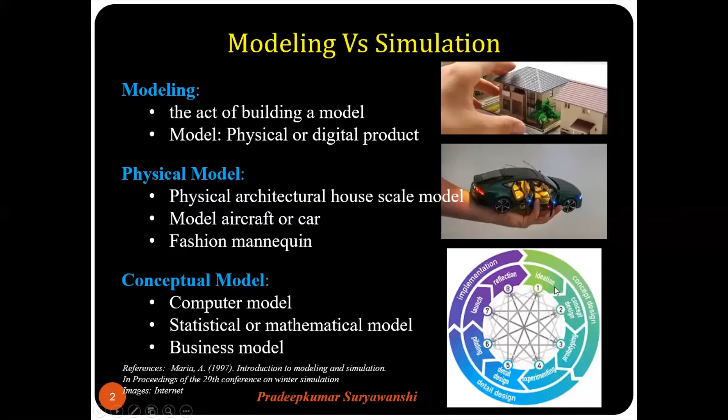Now coming to simulation, simulation is the process of using a model to study the behavior and performance of an actual or theoretical system. The purpose of simulation is to study the characteristics of a real life or fictional system by manipulating various variables. Through simulations, we can evaluate a model for optimum system performance, or we can make predictions about a real system. Simulations are useful to study properties of a model of a real life system, and these real life systems would otherwise be too complex, too large or small, too fast or slow, not accessible, too dangerous, or unacceptable to engage with.

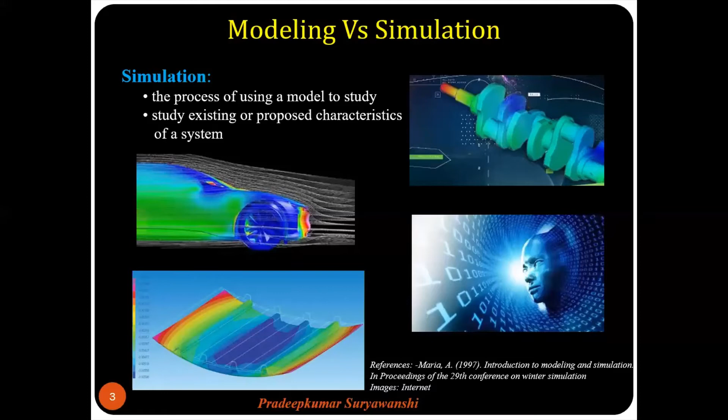So nowadays, there is a hypothesis that the whole human population on the planet Earth is in simulation by some advanced beings in a distant galaxy. And this hypothesis is getting a lot of attention and popularity in the scientific world. Now, that is just a hypothesis. It is not yet proved. But just for fun, you can watch a sci-fi movie. It is a short movie actually with the same name, simulation, and it's fun actually.

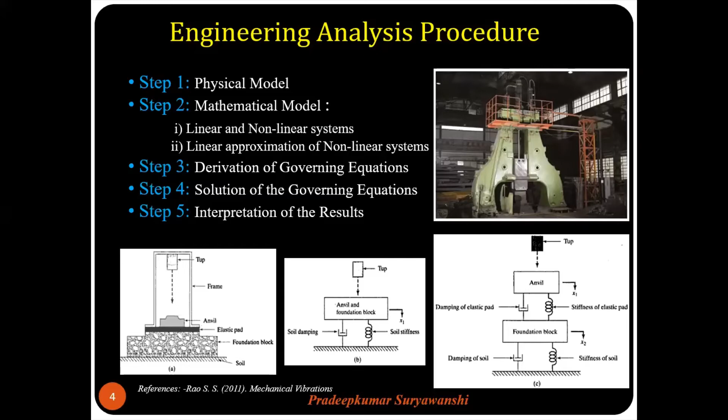Okay, so I'll read the first question. In which sectors do you see applications for the simulation of composites? The clear-cut answer here is the automotive and aerospace sector, which is quite acceptable. And at the distant second place stood commercial vehicle construction, mechanical engineering, medical technology, and rail vehicle construction.

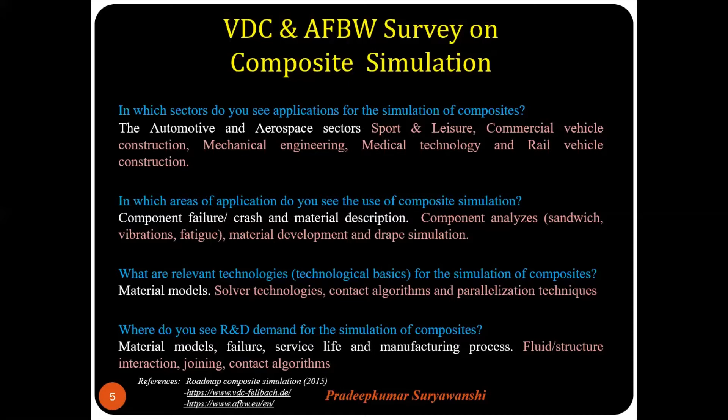This is due to their desirable characteristics such as lightweight, corrosion resistance, high strength, and design flexibility, among many others. However, if you consider biomaterials or so-called biocomposites such as cortical bone, they display mechanical properties that are very different from traditional engineering materials. This is a very important statement: biocomposites are capable of simultaneously optimizing competing properties such as strength and toughness. It's very difficult to find these two contradictory properties in a traditional engineering material.

And even though we have manufactured some good quality composite materials, we have still not been in a position to replicate this particular property of biocomposites. However, with the introduction of micro and nano reinforcements like carbon nanotubes, CNT, or graphene reinforcements, new possibilities of supercomposites have emerged recently. But in order to develop new materials with radically improved properties, the major challenge is to apply biomimetic strategies to synthetic composite materials. This is another very important challenge.

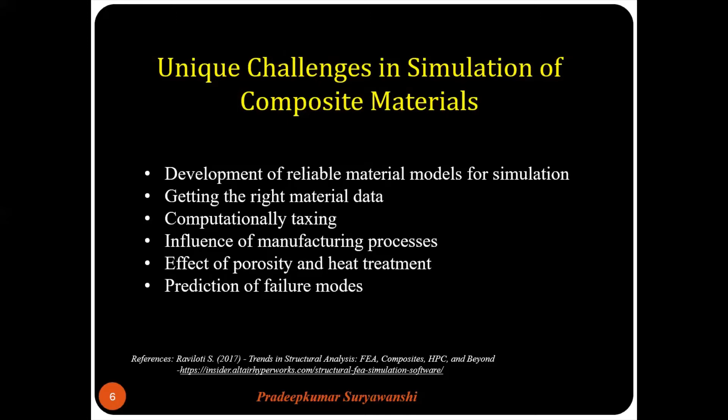Okay, so as a part of my doctoral study, I was trying to zero in on my problem statement, and that time our main focus was how to come up with a material model for simulating deformable objects. Now, if you look at literature, many different models have been presented for this purpose. And typically, the existing models for simulating deformable objects can be classified into three categories: geometry-based models, physically based models, and continuum mechanics-based models.

The geometry-based models are simple geometrical modifications for modeling the deformation behavior of deformable objects, but they are not able to capture realistic physical behavior of the deformable objects. Physically based models describe deformations as physical interaction between simple discrete elements such as nodes or atoms or cells. And the examples are chainmail model, particle systems, mass spring systems, and long element method.

In continuum mechanics based models, the material of an object is considered as a continuum, and constitutive equations are applied over the entire volume. And the examples are smoothed particle hydrodynamics, finite element methods, boundary element method, elasticity theory method, tensor mass method or system, and method of finite spheres. Okay, so along with this, there may be few other simulation models available in the literature.

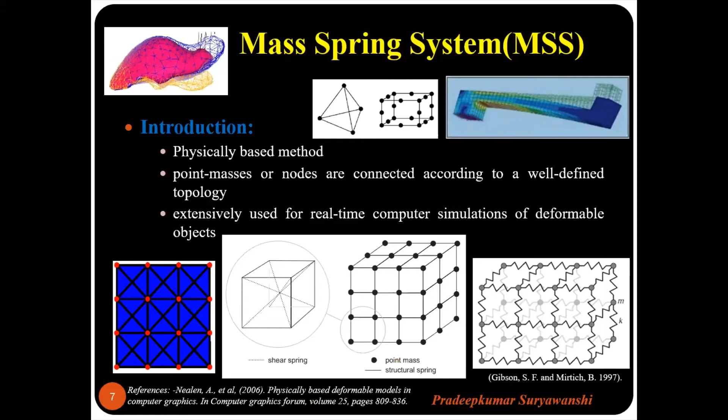Further, it is suited for parallel computation due to local nature of interactions between the nodes. Also, the deformable objects that are very difficult to animate are also successfully animated with the help of MSS models. And finally, very important is MSS models are suitable for damage or rupture simulation with relative ease.

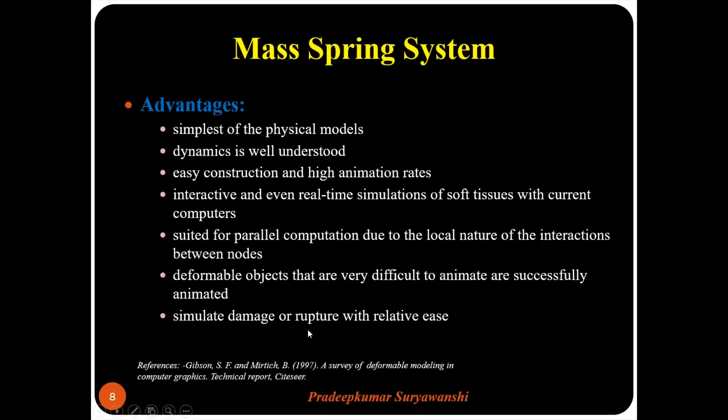Having advantages, it has been applied to various different simulations of deformable objects. Still, it has some open issues. And a very important open issue, according to the literature, is determination of optimal system parameters.

Now, when we concentrate on this determination of optimal system parameters, we come to know through the literature that there are two strategies: a data-driven strategy and an analytical approach to determine optimal system parameters. The data-driven strategy typically focuses on optimization techniques. But before that, what are optimal system parameters?

We are looking at one system. So optimal system parameters are like, what is the spring constant for a given model? What is the nodal mass? Or what should be the mesh topology? Okay. So the data-driven strategy, as I mentioned, is focused on optimization techniques.

And if a change in topology of the mesh is required, the whole procedure for topology identification has to be repeated. And this is not in line with real-time computer simulations. Now, if you look at the analytical approach, there are analytical models which are applicable to specific problems or to a specific choice of system parameters.

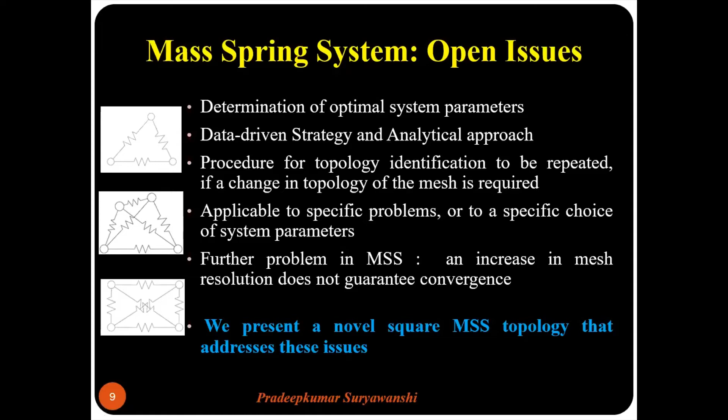The overall arrangement is such that under tensile and compressive loads, the shear spring will undergo negligible deformation, whereas under shear force it will deform considerably. So in all, our proposed model consists of 10 springs, and in order to simulate a generalized material, we looked at orthotropic material, and specifically we concentrated on a special case of orthotropic material called transversely isotropic material.

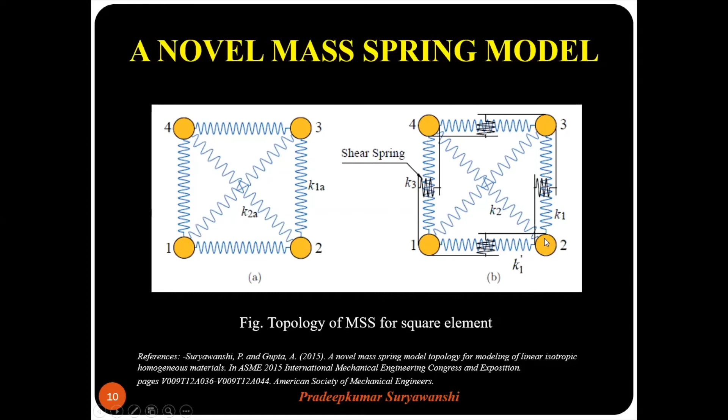For simulating this transversely isotropic material, we considered the stiffness of vertical springs, that is springs between nodes 1 and 4 and 2 and 3, as K1, whereas the stiffness of horizontal springs we consider as K1 prime, and for diagonal springs we considered spring stiffness as K2. So in this slide, I will explain how the deformation of the shear spring happens.

Just give me 1 minute. I'll just drink some water.

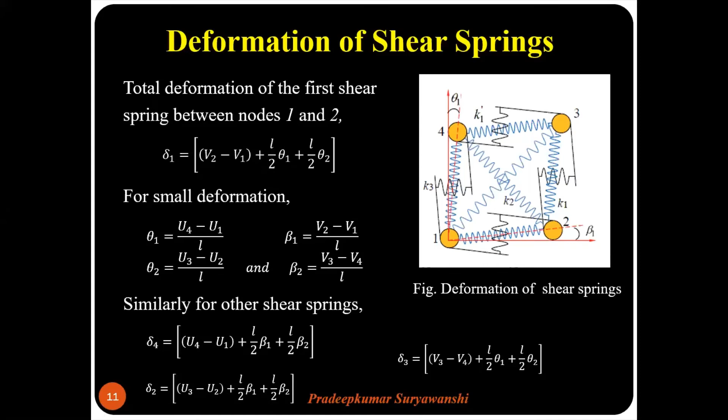So essentially for the basic model we get a K matrix, that is stiffness matrix of size 8 by 8 for this unit cell, and in that same matrix we simply impose the effect of newly introduced shear springs. Now I'll explain in brief our methodology for identification of spring stiffnesses. As I mentioned, the material considered is transversely isotropic material, and we consider an analytical approach for determination of spring stiffnesses.

For this purpose, we consider comparison between a square continuum element and the square unit cell of mass spring model under similar loading and boundary conditions. These are the assumptions. We assume that the bottom left corner of the continuum element and MSS model is constrained, whereas the bottom right corner is on rollers. The material is under plane stress and the system undergoes small deformation. We specifically impose the condition that the continuum and MSS models undergo equal deformation under the applied force.

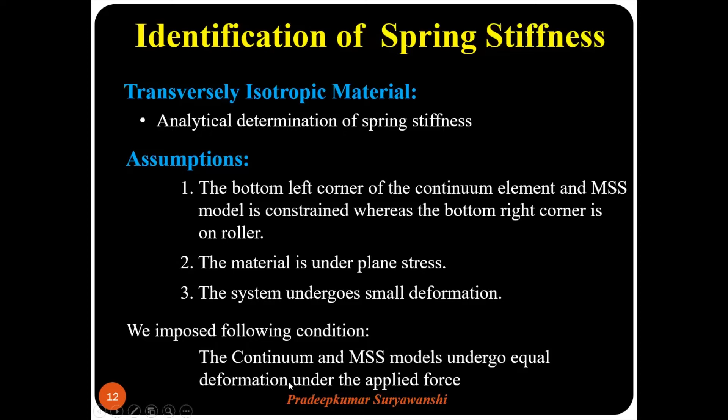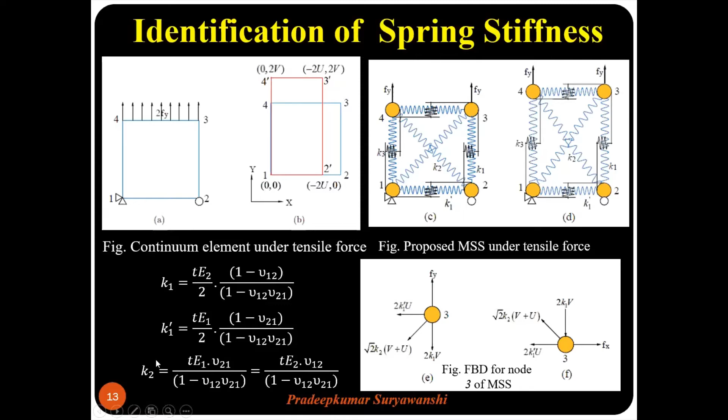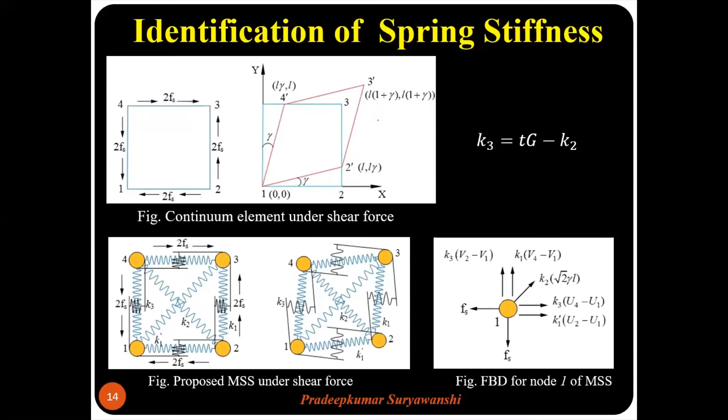Okay, so we are now ready with the various spring stiffnesses for the proposed MSS model, for transversely isotropic material. Once you are ready with the material model, the next step is to verify your model. And how do you verify your model? For that purpose, you need to write some sort of program in the available languages or platforms. We use MATLAB as a platform, and this flow chart shows the overall flow of the solution we are looking at for simulation of different

But here, because our attention is focused on composite materials, I will just present the results related to composite simulations. Now I'll just take you through this flow. Initially, in the code, we specify the material properties, then we give the specimen size, we specify the mesh size, we apply the boundary conditions, and by doing so, we finally calculate spring stiffnesses in the model using the expressions we have derived on the previous slides. And we obtain something called a spring data matrix and also a nodal data matrix.

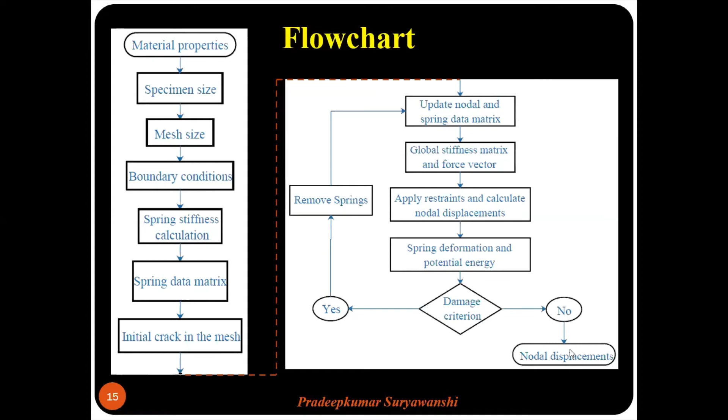Now, for your further understanding, I will just move out of this particular presentation and show my MATLAB desktop. Okay, I hope you are able to see this MATLAB desktop here. Now I'm going to take you.

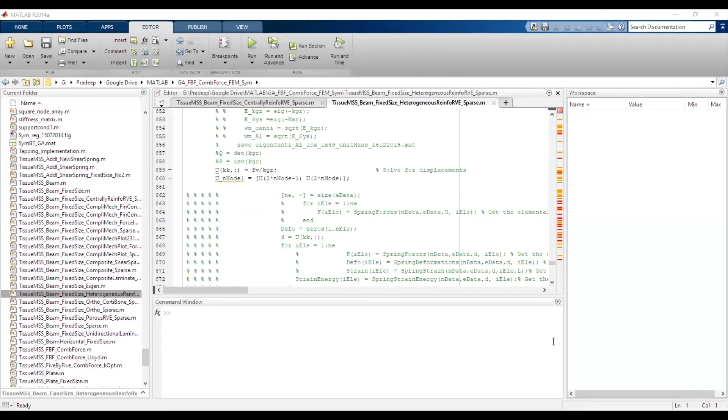Sir, MATLAB desktop is not visible. The PPT is only visible. You minimize that, sir. What should I minimize? You minimize your PPT. Okay. And I need to share this MATLAB desktop, right? No. Just minimize it, it will be visible. Yeah, I did it. So now is it visible? No, it is not visible. Sir, you need to share your MATLAB screen. Okay, so I'll stop share and then reshare it. Stop share and directly share screen. Just click on share screen. Yes, I'm coming to that. I think it should be visible now. Hello? Yes, sir, it is visible. Can you see this change in screen? Yeah, it is visible. Okay, sir.

Okay. Proceed. So I will explain the flow I just explained with the help of the actual code I have written for this purpose. So this is a code for simulation of heterogeneous reinforced composite structure. Basically the basic code is same; we keep on modifying as per the requirements. So here you can see n data. It is defined in this way: x, y, x load, y load, x restraint, and y restraint. That indicates the x coordinate or y coordinate, load in x direction, load in y direction on a given node.

So this n data is nodal data, x restraint and y restraint. Which of these nodes are restrained, or which of these nodes are on roller, we can specify here. If 1 is there, it is restrained, and if 0, the node is free. We have elemental data, that is spring data. There are so many springs in that particular mesh. So E data represents the ith node and jth node, which indicates the spring between the ith node and jth node, and the stiffness of that spring. That is an n cross 3 matrix. Initially, as I mentioned, if you want to introduce some reinforcement or crack, then we specify this particular variable here.

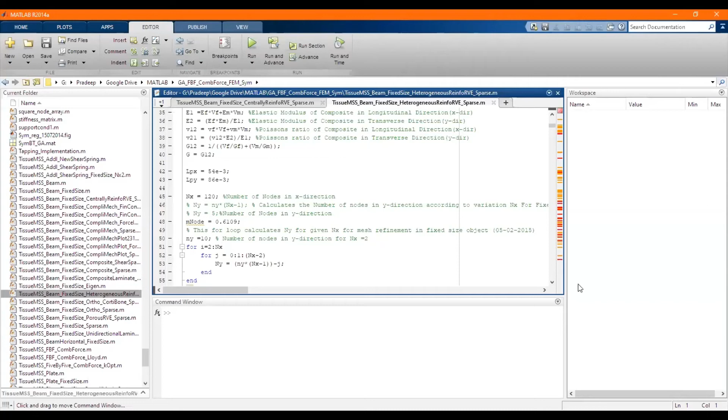Then we define the size of the actual model that is being simulated: 54 millimeter by 86 millimeter. Then we specify the mesh size. For that, I just mention the number of nodes in the x direction, and here it will calculate the number of nodes in the y direction. We also calculate the total number of MSS square elements, that means a square in itself, which comprises of 6 springs. We apply this.

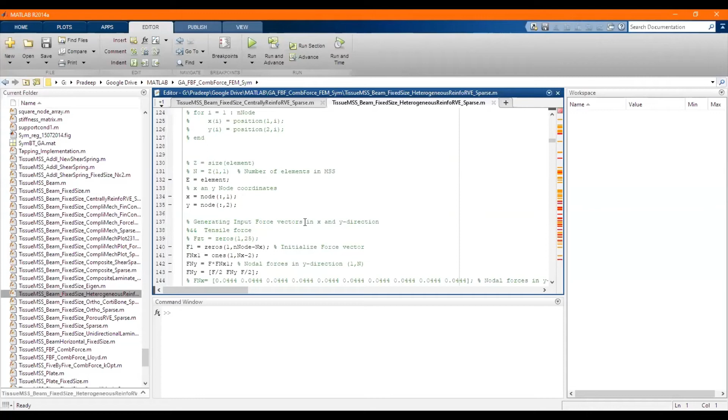Then we calculate the position of each node in that particular mesh, and for that purpose we run this separately written function called mesh region, and it gives me nodal data and elemental data. That is stored in a variable E, and then we generate the input force vectors, because we are applying the input force like tensile load or compressive load or transverse load on the top edge of the beam or plate, if you are assuming the vertical orientation. So here these force vectors are calculated.

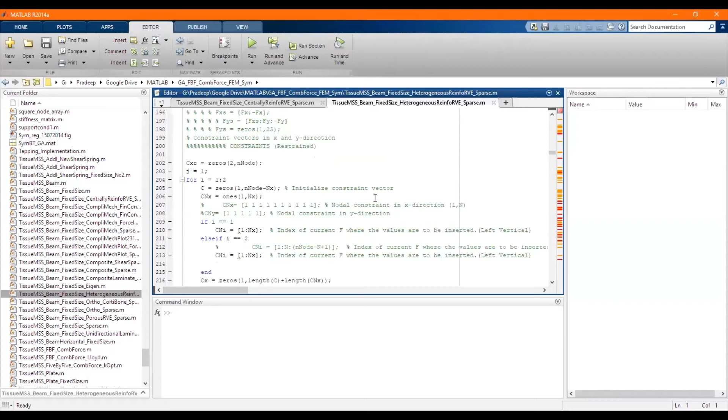The top nodes where the force is applied will have some value, whereas all other nodes will have value 0. So the force vector is created here for different types of loadings: tensile, shear, and compressive. Then we apply constraints or restraints in the mesh. As I mentioned, the left bottom corner is fixed to avoid rotation, and the right bottom corner is on a roller. The specific nodes are given the number 1 if constrained. If constrained in x and y direction, both constraints will be 1 1. If constrained in only one direction, only in that direction we apply 1. Otherwise, it will be 0, indicating the node is free. So I apply constraints here.

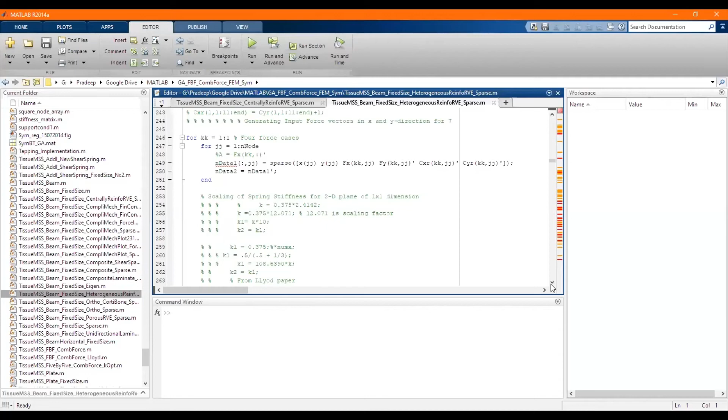We collect force vectors and constraint vectors, and then we come to a loop where we consider the nodal data. Now nodal data is modified with this: the nodes' x coordinates, y coordinates, force vector in x direction, force vector in y direction, constraints in x direction, and constraints in y direction. So this gives me complete nodal data. Once I find the complete nodal data, we make use of these expressions and come up with the elemental data. By elemental data, I mean the springs. There are many springs in the mesh. So what is the stiffness of a given individual spring? How do we assign that? This for loop does that.

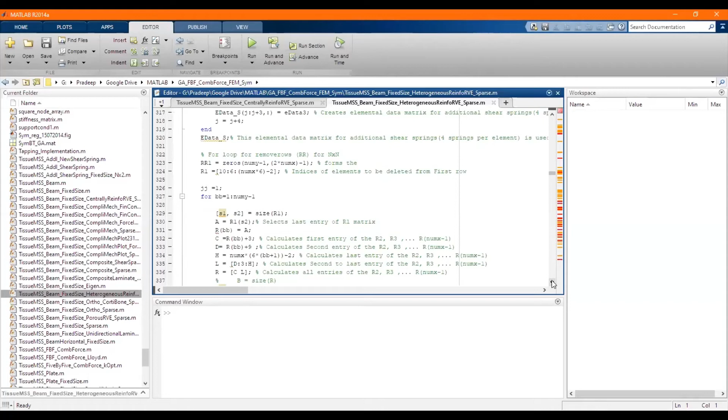Then elements, that is springs, are connected between the nodes, and there are positions where, for example, when 2 unit cells are stacked side by side, there are 2 springs sitting side by side. So we need to add the thicknesses for that and consider a single spring there instead of two springs. That operation is done here. And finally elemental data by removing additional things.

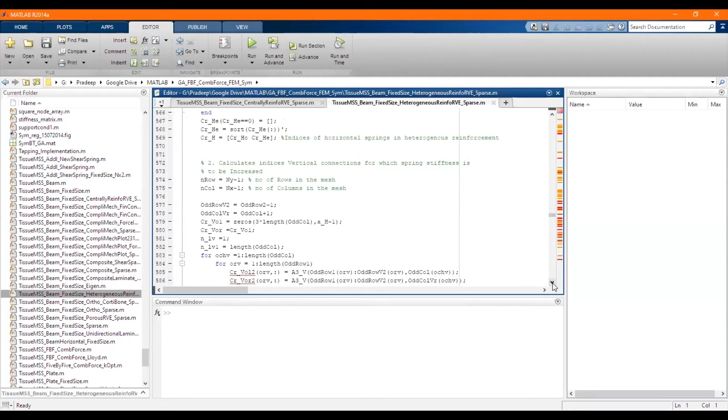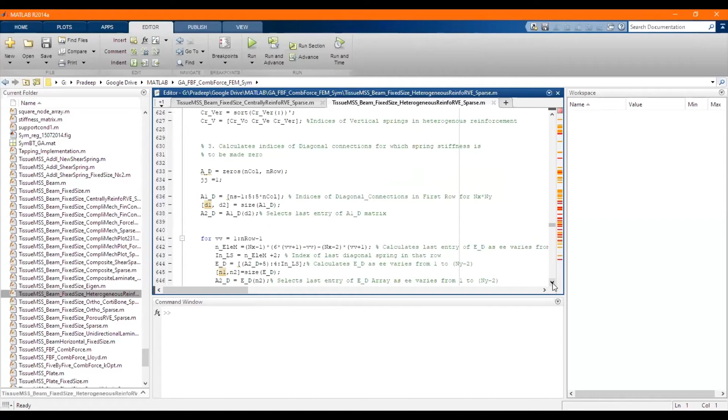Now here we find the indices for horizontal connections for which spring stiffness is to be doubled. Likewise for vertical connections, and for diagonal connections wherever required. Why do we need these indices? We can play with the simulation by changing the stiffnesses of these springs. It can be doubled, reduced to half, changed to 100 times, or removed completely by assigning stiffness as 0. So we find indices of these springs, and we can remove, increase or change the stiffnesses of a desired number of springs in the mesh.

So we are still doing that. Calculate the index of anti-diagonals here; these are required for removing springs. Okay, so still we are into that. Now introduction of central reinforcement in the mesh is completed. So suppose you have a heterogeneous structure or central reinforcement, or if you want to introduce a crack, we require all these indices so we can play with it.

Then we apply the actual force at the top layer, and it will be divided among the top nodes. Here we get the force vectors from the initially calculated force vectors. Further nodal data is updated here according to requirement, and we calculate the KG matrix, that is the global stiffness matrix, by using a function called assemble GSM. That is, we are calling this function. It is another code of so many lines.

Here, K shear is the matrix which is updated in the KG matrix. So this particular matrix will be updated in the KG matrix. So add element MSS underscore K3 new actually adds or updates the global stiffness matrix for our proposed MSS model by adapting the stiffnesses K3 in the global stiffness matrix.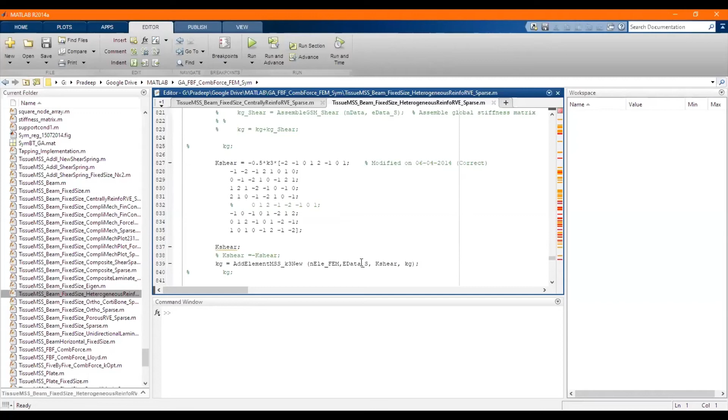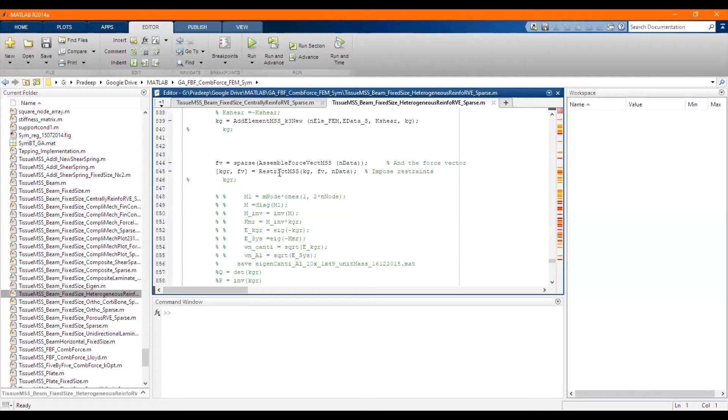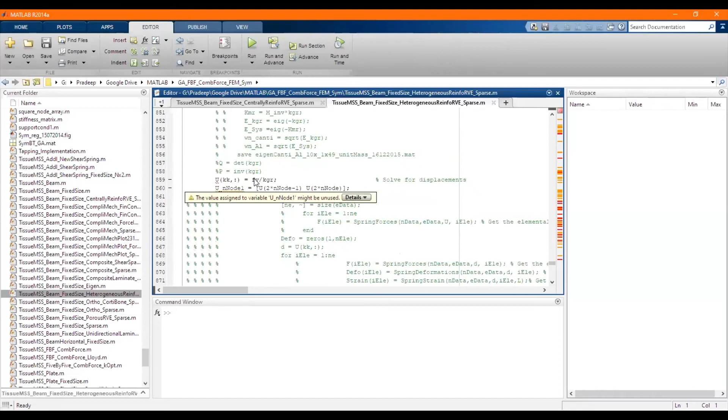Then we apply the force vectors, we apply the restraints, and we come up with the restrained K matrix. And here we solve it for the nodal displacements, that is F upon K. We collect the nodal displacement for all the nodes or a specific node of choice. On the basis of this nodal displacement, we can find out the potential energy or strain energy of the spring elements, or we can find out deformations. And we can use these nodal displacements for post-processing, similar to the FEM model.

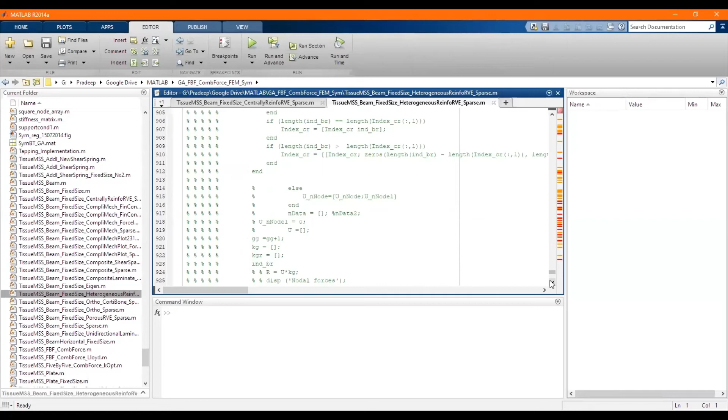Like in FEM, we have some shape functions, and we plot the full field displacement, full field stress, full field strain. All those things can be performed with another code which I have written for the purpose, which I will show just here, stress recovery subplot. I will give the simulation data from the previous code in this code as input, and we will be able to plot full field displacement, full field stress, or full field strain. All these results I will show on my next slide. So I think I will share my PPT again now.

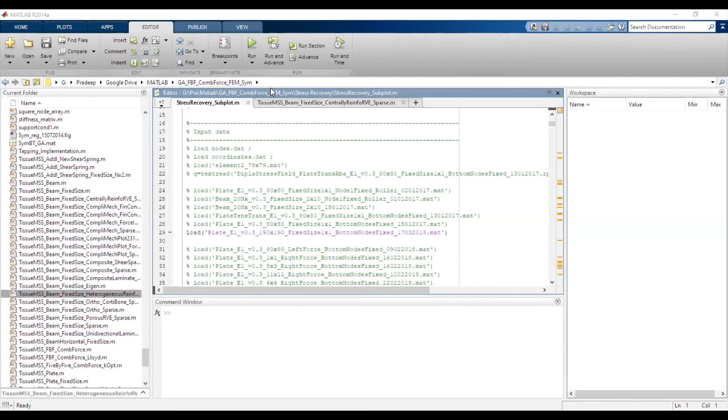Yeah, so is it visible, sir? It's visible, sir. Yeah. So I'll move on to now simulation results. Sir, please make slide show. Yeah. Okay.

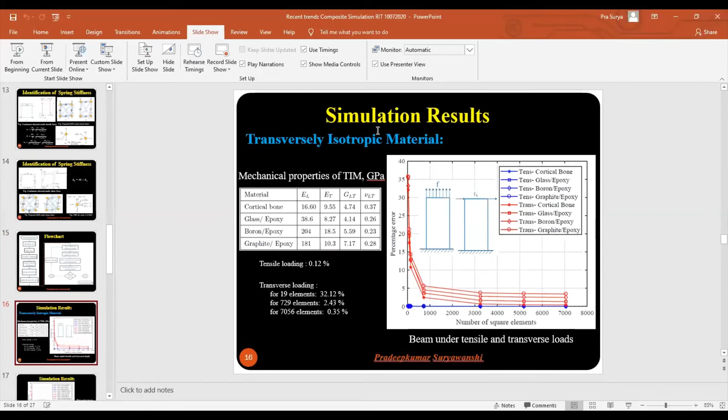Okay, sir. So once we develop the material model, propose this MSS model, and come up with a code for simulation purposes, we perform simulations to verify our model. For this purpose, we considered beam and plate simulations under tensile and transverse loading, and compared the results with similar FEM simulations, and for that purpose we made use of Abaqus software. We consider various materials, again transversely isotropic materials, composite materials. Here I have enlisted all of them, and for the characterization of effectiveness of the MSS model, we consider the percentage error as the criteria. Now, how do we define percentage error here?

We consider the node in this mesh which is undergoing maximum deformation or displacement, and we compare the displacement of that node with the displacement of the corresponding node in the FEM simulation, and the difference of these two divided by the maximum displacement in the FEM simulation gives the percentage error. Now, if you look at this slide, here I have plotted percentage error versus number of square elements. One of the major problems with the MSS model was that it does not converge to the correct solution. That's what I have mentioned.

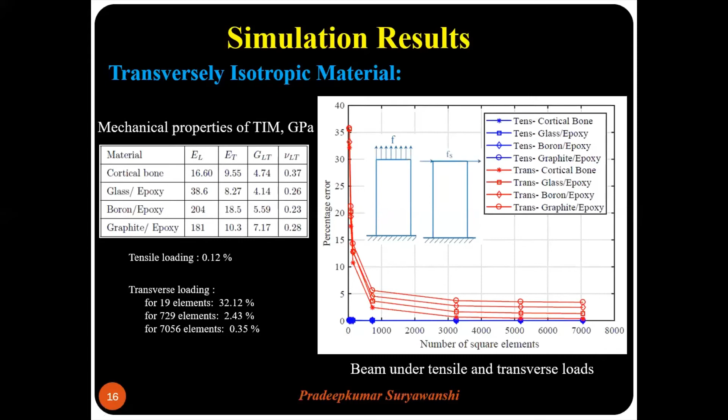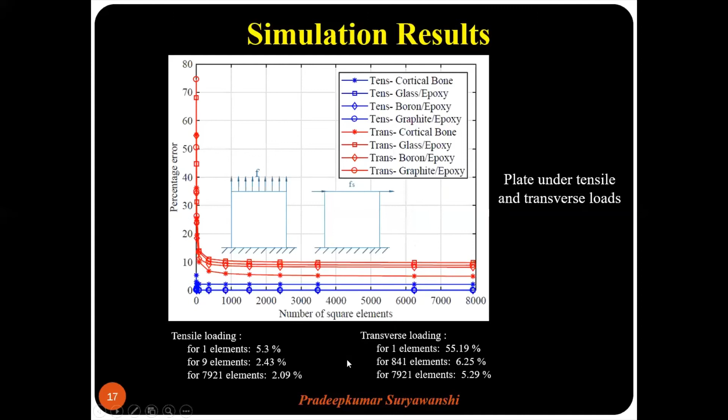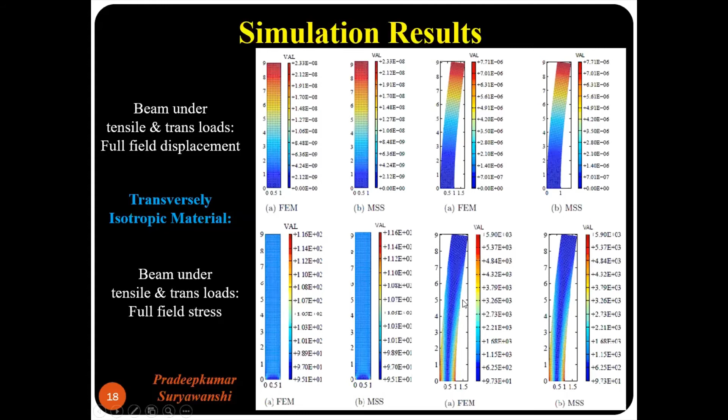please bear with me.

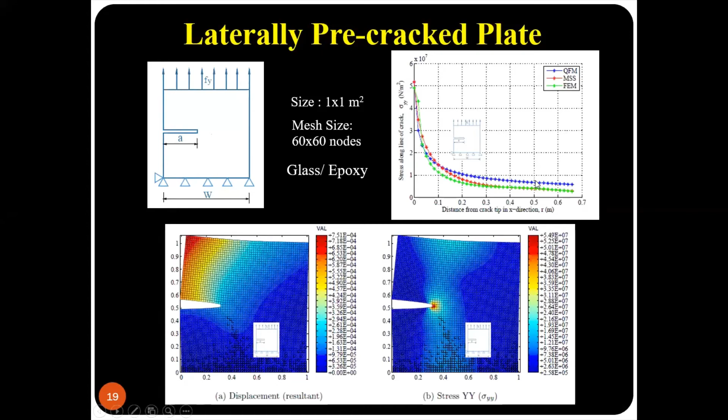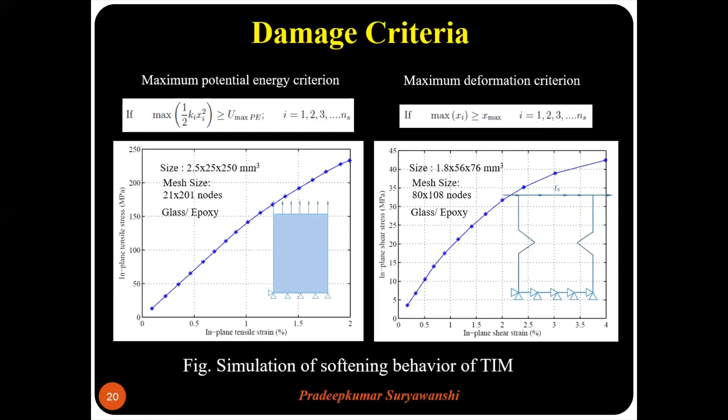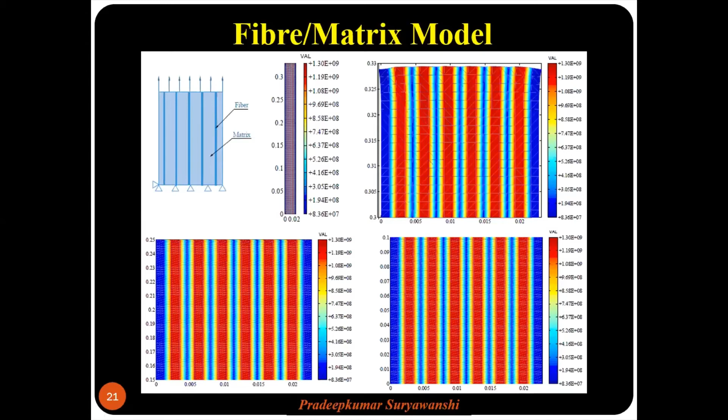Okay, so we'll move on to the next slide now. So here again, two more slides which I will explain about our simulations. So we are almost towards the end of my presentation.

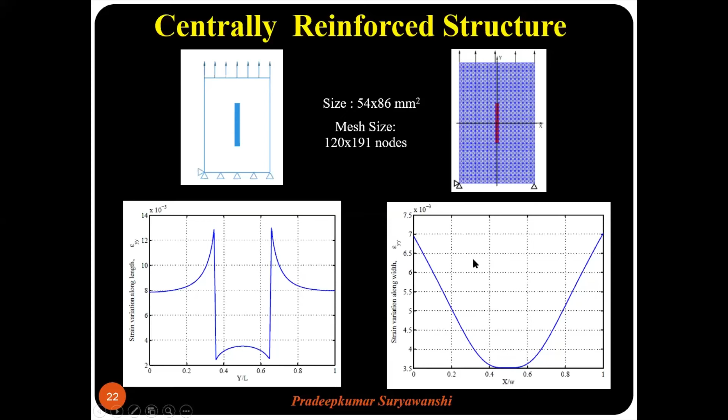Then as we move from left to right side, we can see this is the variation of the epsilon yy along the horizontal, along the x direction as shown here. Okay, so on the extreme left there is a large strain, and in the inclusion there is negligible strain, and it is increasing as we move in the matrix material. And these results are in quite good agreement with the results presented in the literature.

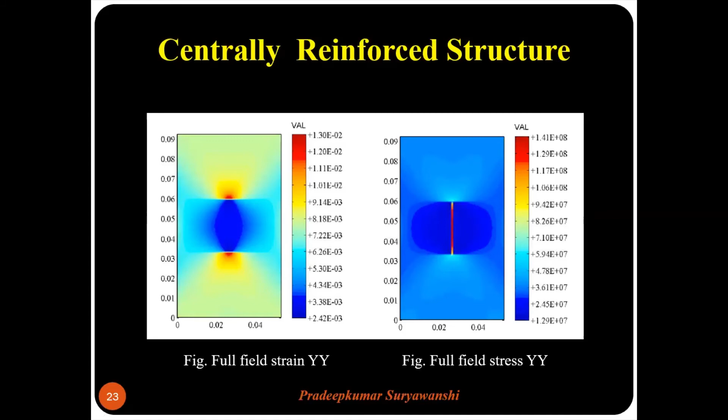Finally, we will discuss one more simulation about heterogeneous reinforcement or reinforcement matrix structure. So in this case, we considered a lamina in which the fiber is heterogeneous. The mixing of reinforcements and matrix is heterogeneous. It is not uniform or unidirectional as shown here. Okay, and we perform similar simulations as I mentioned for central reinforcement.

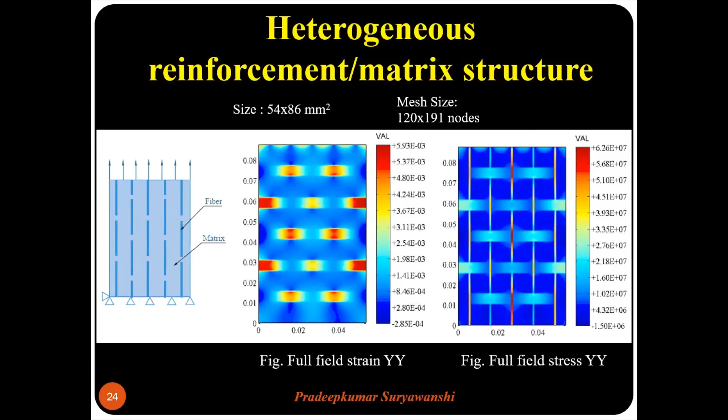this composite structure. So here again we can see full field stress, wherein the maximum stress is taken by the fiber material, and all these results are in line with the experimental as well as the results presented in the literature. Okay, so I'm done with my simulation results as far as my material model is concerned. That is our novel MSS model for simulation of deformable objects.

Now we are towards the end of my presentation. I will wind up after this slide, wherein I'm giving some tips for new users in composite simulation. So these are just a collection of tips. Depending on the perception and expertise of the people, they will have different lists. Okay, so the first one is design with an understanding of the manufacturing methods. This is the first tip to the new user.

What I mean by this is that composite material behavior depends strongly on details of both part design and manufacturing process. And there are endless combinations of fiber types, matrices, manufacturing methods, laminate and conditions. And each combination can yield unique behavior. Therefore, fabrication method is just as important in the design phase as the design itself. So we need to pay attention to design of the part as well as the manufacturing process.

Next is learn the nuances of the material. Working with composite materials is completely different from working with normal engineering materials. You may be simulating a part that will be formed by laying sheets of fiber embedded materials, or your part might begin as a liquid resin filled with short fibers.

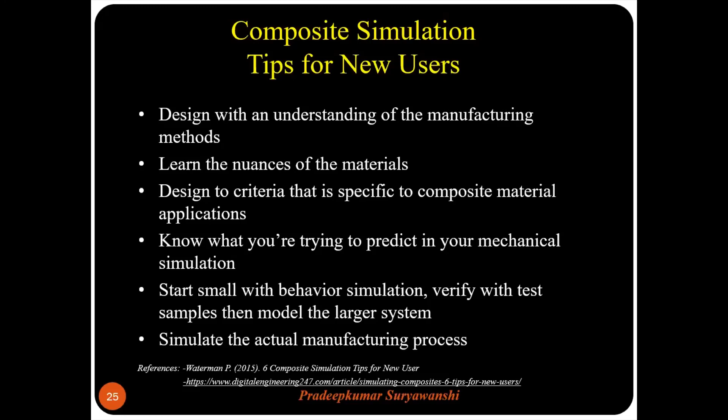So here there are few tips which I have mentioned, but as I mentioned when I discussed what are the key challenges, it is important for the designer to see in which area we want to work and zero in on that. First of all, understand all those possibilities in that particular area and start your further study. That is very important. It's not possible to assimilate everything which is available. So with that, I am moving on to next slide.

Wherein we have presented resources and composites oriented software tools. For your further exploration and deep understanding, you can refer all these slides. I'm not going to explain about this, but here we can see the list of various software models and what material you can refer on that particular website. So this is for your further understanding.

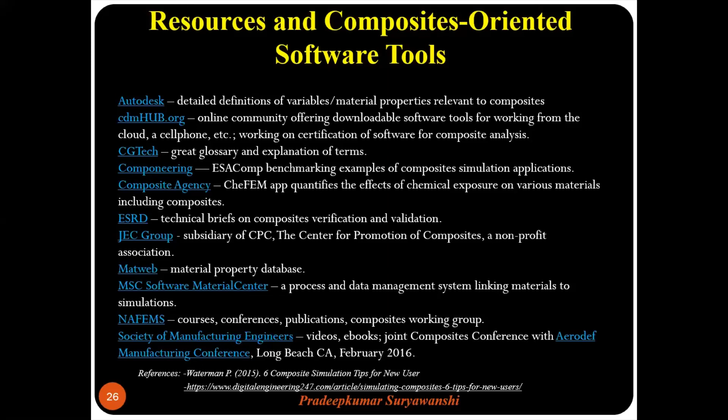Okay. So with this, I'm done with my presentation. Thank you very much, and we can open for now question and answer session.

So I request the participants. Sir, shall I make you as host? Yeah, sir. Please do it. Is my screen visible? Yes, sir. Okay. Any questions are there? I request the participants, please raise your hands. I can mute it from this side. And sir is with us, and he will be guiding us. Please ask your question if any.